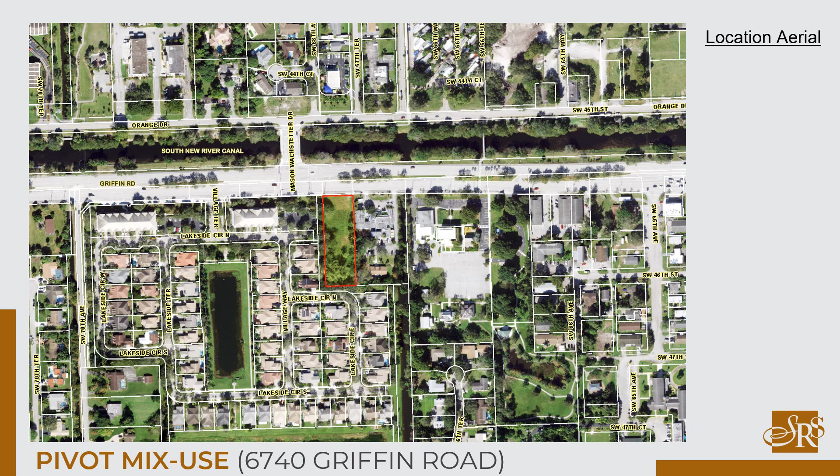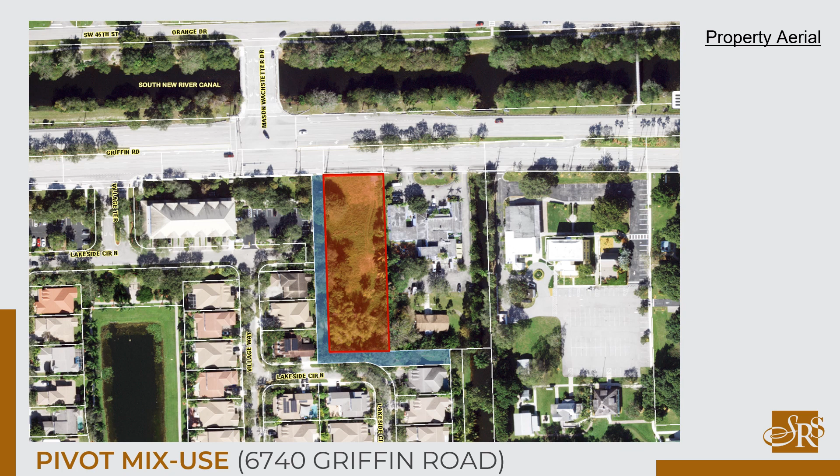A lake maintenance easement exists along the west and south of our property that serves the adjacent Lakeside Village. The survey notes the narrow and long rectangular shape of our parcel. A portion of the property along the south end was previously zoned agricultural A1, which was successfully rezoned and previously approved on September 18, 2019.

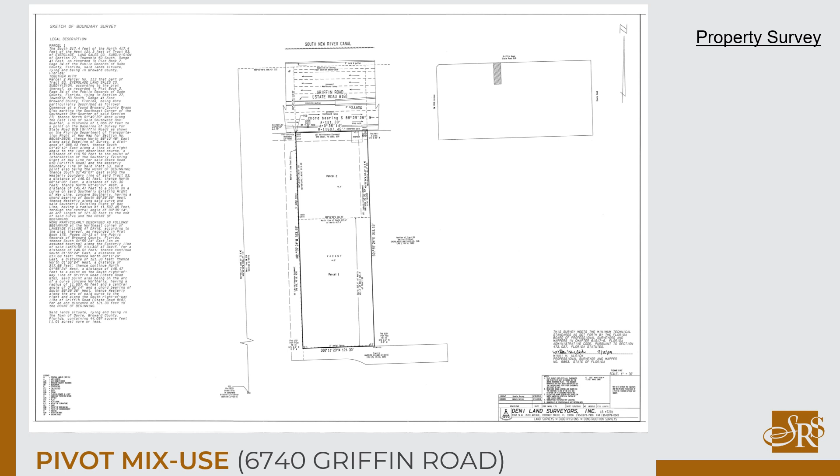The proposed Pivot mixed-use development is in the Town of Davie's Griffin Quarter District and was previously approved by the Town of Davie on October 22, 2019. Due to COVID, the project became dormant and the approved site plan expired. Nonetheless, a required plat was approved and recorded on February 18, 2022. The plat note allows 8 garden apartments and 4,800 square feet of office use.

This application is an exact repetition of the previously approved site plan. The proposed site plan is the same 3-story building with a ground floor area of 4,800 square feet of office use, and 4 garden apartments on the 2nd floor and on the 3rd floor. Thus, this application is consistent with the recorded plat.

The Griffin Quarter District requires a minimum lot of 65,000 square feet. We are requesting a variance for our existing lot, which is only 44,097 square feet. The district also requires a minimum lot width of 250 feet, and we are requesting a variance from our existing lot width of 121.3 feet.

The site plan depicts the parking lot's access running perpendicular to Griffin Road, with a hammerhead at the end of the access driveway allowing for emergency vehicle accessibility. On the south end of the proposed development, a stormwater retention area is intended to collect stormwater on site and allow it to be properly treated before connection to the greater drainage system. The proposed site plan was previously approved by the Central Broward Water Control District.

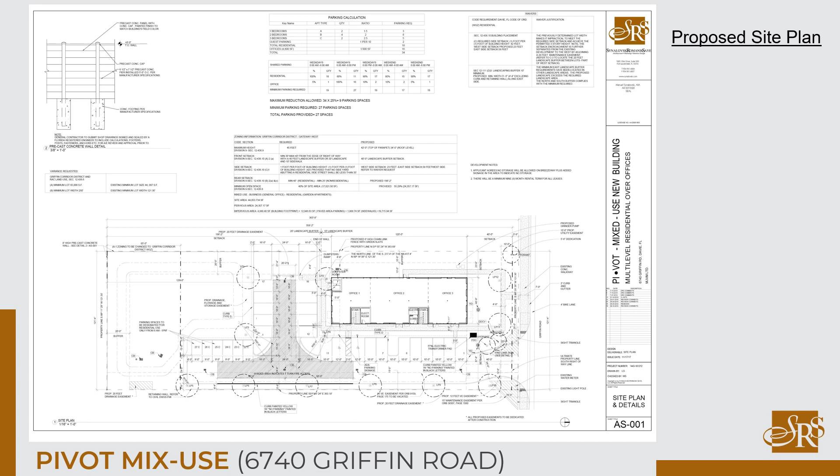Privacy walls separate the proposed development from the residential uses to the west and south. In this proposed landscape plan, you can see we're providing significant landscaping along Griffin Road, consistent with the Griffin Quarter District and Town of Davie requirements. Also, we're providing extraordinary landscaping along the perimeter of the property at the east, south, and west property lines. Foundation planting around the building footprint and all parking areas and parking islands comply with the Town of Davie landscape requirements.

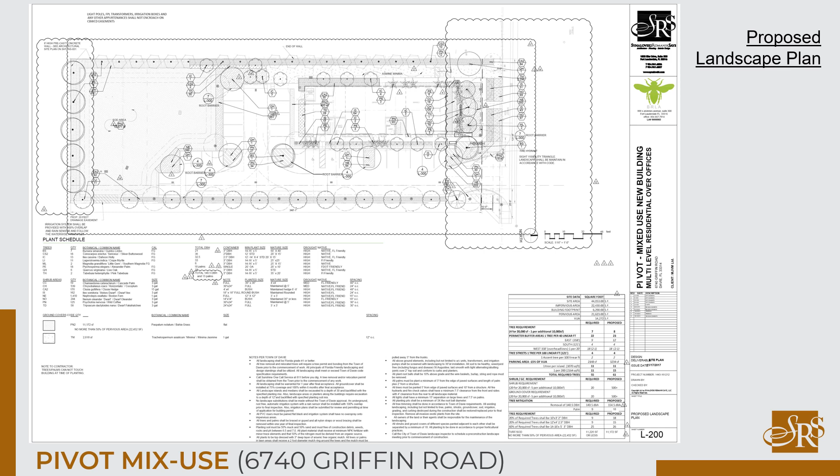Light poles have been strategically located so that they do not conflict with proposed trees in our landscape plan. Further, the light poles and proposed lamps are in full compliance with the standards of the Griffin Quarter District aesthetics.

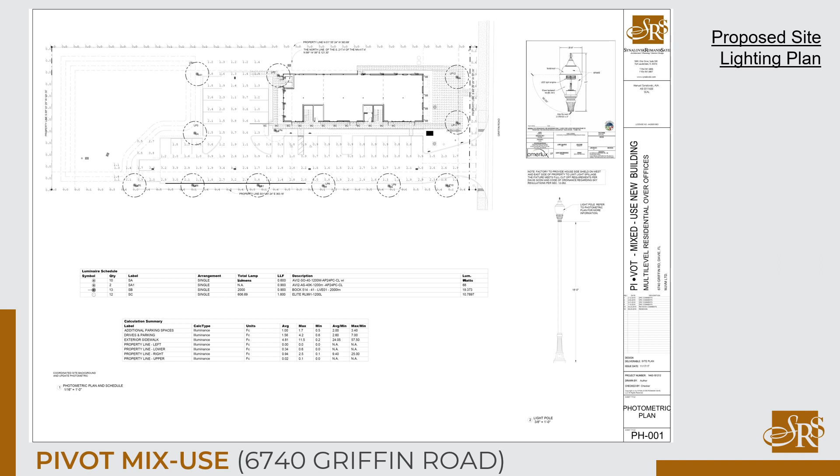The proposed floor plans indicate the mixed-use 3-story building with 4,800 square feet of ground floor office use and a total of 8 garden apartments, equally split with 4 units on the 2nd and 4 units on the 3rd floor. The building's flat roof is accessed by one of the building staircases, with access limited for maintenance of rooftop mechanical equipment. All rooftop mechanical equipment is shielded from view of pedestrians or vehicles within the surrounding community.

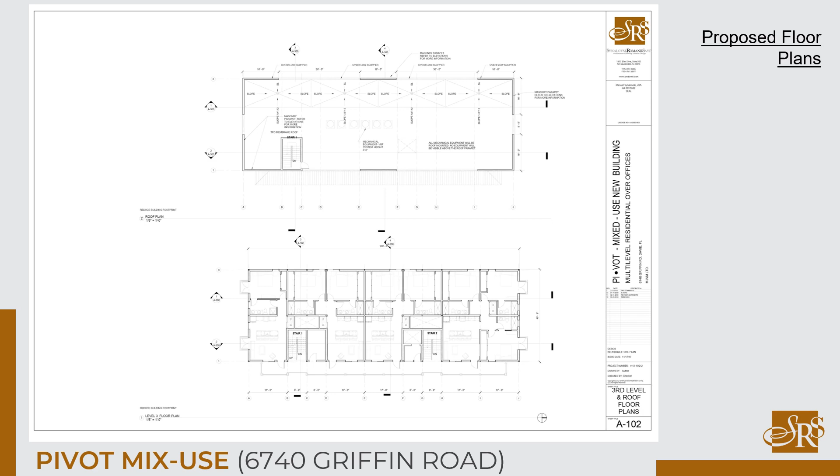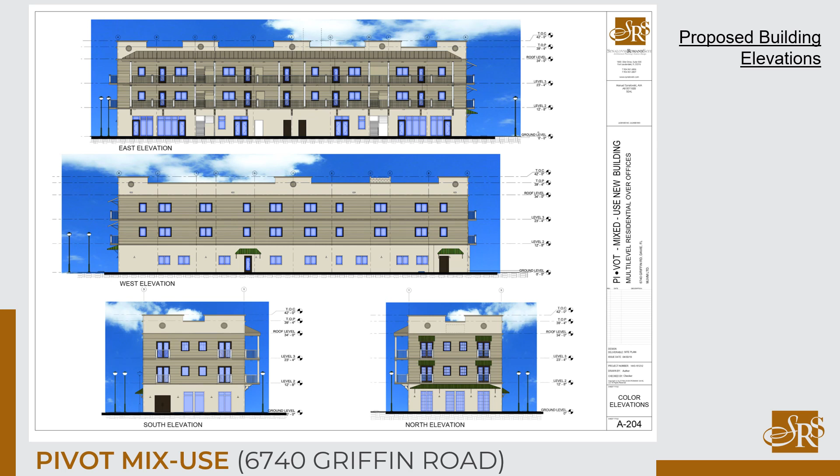The building finishes are in full compliance with the aesthetic requirements of the Griffin Quarter District, whether it be siding, stucco, horizontal bands, parapet caps, decorative medallions, building colors, the use of balconies, canopies, decorative railings, decorative columns, glazing, and exterior lighting. All materials and building finishes embrace the character of the neighboring community.

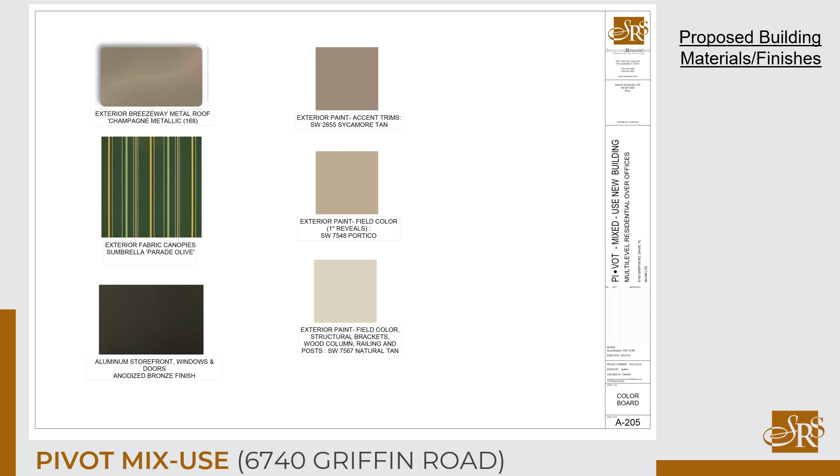This image shows the use of dark aluminum storefront windows and doors to simulate wood. The use of bright and joyful fabrics for canvas canopies, as well as the selection of building colors, are consistent with the design criteria of the Griffin Quarter District.